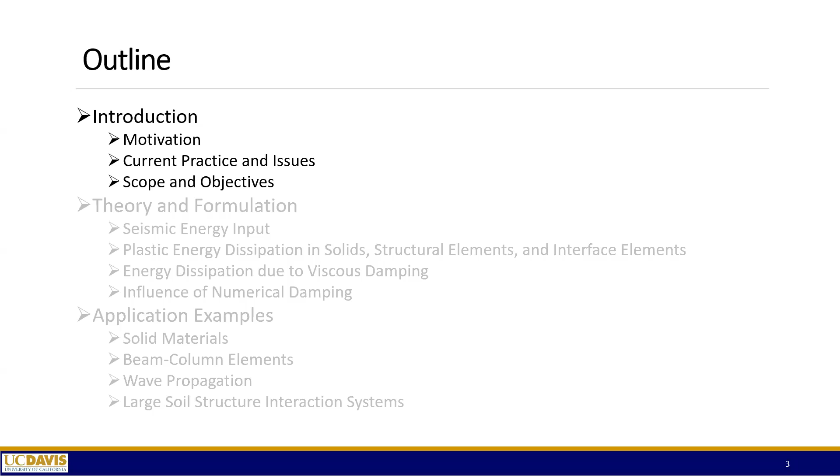For a beam that is loaded like this, usually so-called plastic hinges will develop, and within those plastic hinges there will be material damage, permanent deformation, and also energy dissipation in the form of heat. So the point here is that if we can properly model energy dissipation in structures and soils, we can actually track the material damage, and that is very important information in engineering designs.

Can you go back? I'm sorry. So essentially the idea is to change the design so that, for a given earthquake, or different motions for a given set of motions, you change the design in such a way to dissipate energy, to damage the material, the structure and the foundation and soil if you care about that, in a way that you as a design engineer want to damage it, as opposed to designing it and hoping for the best.

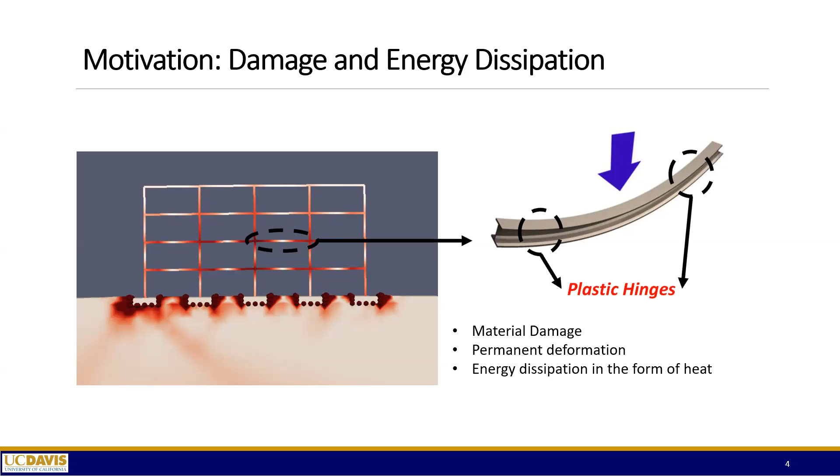And you'll see toward the end, the same example with a different type of foundation actually reduces a lot the amount of damage, the amount of dissipation that happens in those beams. And that's, in this case, what we care about. We want to limit the damage in the structure and maybe put the dissipation down into the soil. Anyway, I'm sorry, go ahead. Yes, that is absolutely correct. Later we will revisit this example to directly show you how changing design can result in a change in energy dissipation.

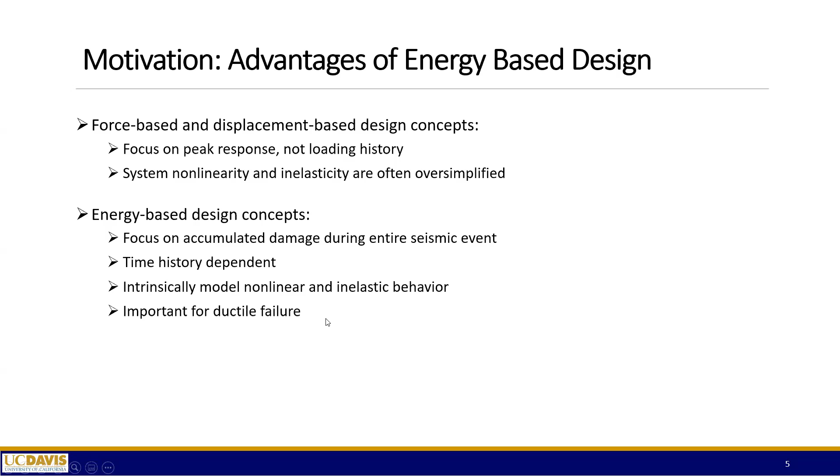So here are some of the advantages of energy-based design. On one hand, we have the traditional force-based and displacement-based design concepts that mainly focus on peak response, not loading history, and often oversimplify nonlinearity and inelasticity. On the other hand, the energy-based design concept focuses on accumulated damage during the entire seismic event. It is time history dependent. It intrinsically models the nonlinear and inelastic behavior of the materials. And it is very important for ductile failure because it tracks the accumulated energy dissipation and damage.

However, in the energy-based design field, this oversimplified modeling is still a predominant problem. So we can definitely improve on that. And just to interject here, so yes, these simplified models might be okay, but one has to be able to show with a more sophisticated model that these simplified models, which can run very fast, are able to model all the details of what is of interest to the engineer. If they cannot model that, for example, if it's a single degree of freedom system, you cannot model the second mode. Maybe the second mode is important.

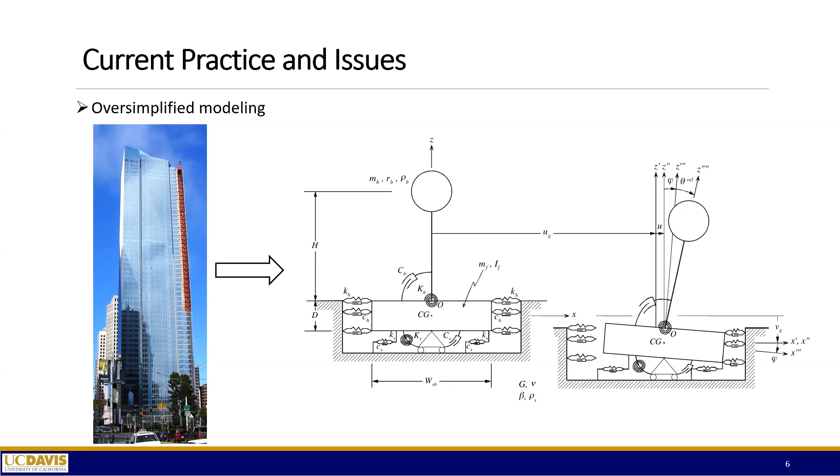Things like that. And of course, these sets of dampers and springs at the bottom, I'm not sure that they actually properly represent the behavior of soil and radiation damping and viscosity of the system and so on. So they might be okay for some analysis, but you have to be able to demonstrate that they're okay. And to demonstrate, you have to be able to go one or two levels of sophistication higher and show that those simplifications are not destroying your results. Go ahead, I'm sorry. Right, yeah, no problem. So yes, that is one big problem, the oversimplification.

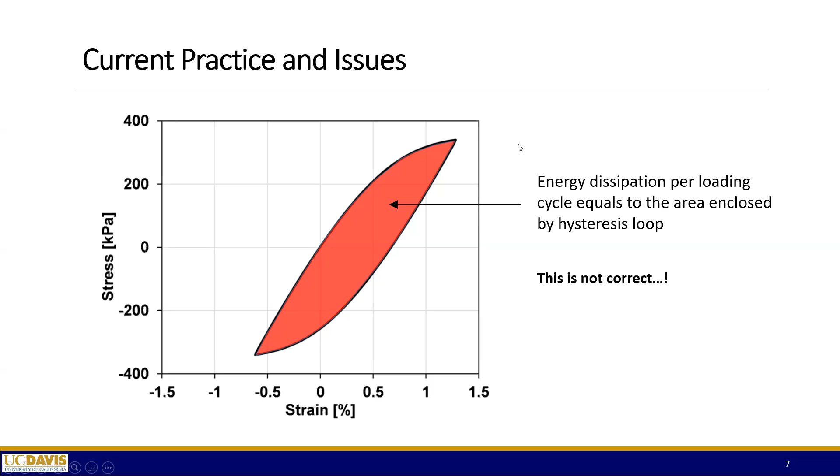So next we move on to a more technical issue here. So this is what we have been taught for a really long time. So for example, if we have a stress-strain loop that looks like this, then we have been taught that the energy dissipation per loading cycle equals the area enclosed by the hysteresis loop. So basically, if you have a loading that goes one cycle, you say that this red area here is the amount of energy dissipation per that loading cycle. But however, that is not correct. And later we will demonstrate why this is not correct.

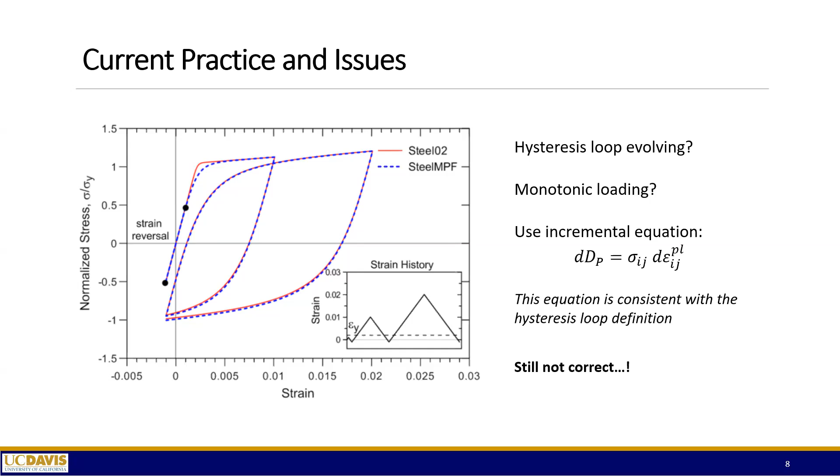However, the same as before, this is still not correct. And again, we will talk about that. Yes, so this equation is what I remember from school. Essentially, everybody thinks that this is plastic dissipation. It is not. It's plastic work. Yeah, I'm sorry. Go ahead. Yeah. So let's first look at what would happen if you actually use that equation, and that happens a lot in literature. So this is an example we obtained from one of the many famous papers.

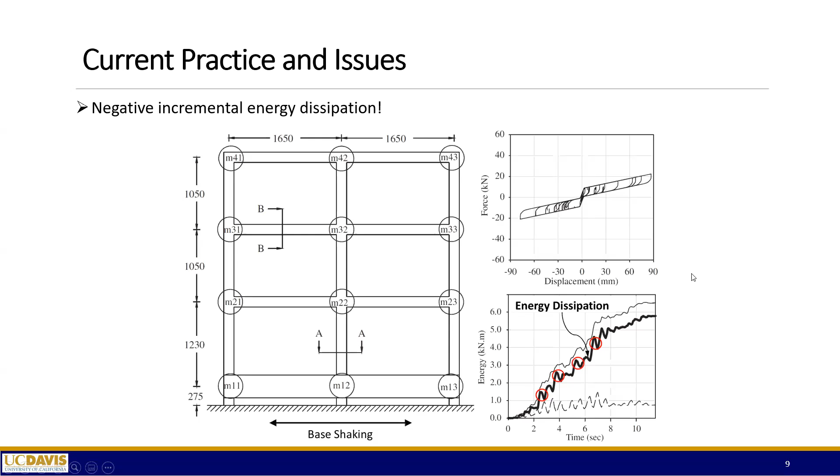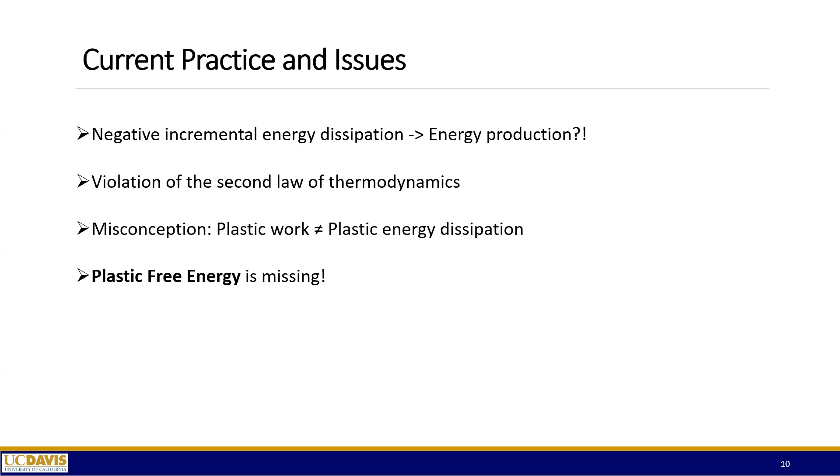So a negative incremental energy dissipation means that at those time steps, you actually have energy production. And that is a direct violation of the second law of thermodynamics. That is impossible. So something was wrong there. So the source of that problem is actually the misconception between plastic work and plastic energy dissipation. As Professor Boris mentioned before, those two are not the same. And the difference between them is a very important energy form called the plastic free energy. Yes. And of course, we will talk about the plastic free energy, its source, and how we calculate that.

Okay, so here, let me just move on to kind of a bigger picture: the entire process of the propagation of seismic energy from the source to our local site. So we know that at the rupture of an earthquake, there is a huge amount of potential energy released at the earthquake source.

And then this amount of potential energy will propagate in the earth with the seismic waves. So we know that during that process, there's a huge amount of energy already dissipated with the scattering of the waves and the inelasticity of the rock and soil. So there will be a certain amount of mechanical energy that reaches your local site, and this is where our interest starts. So this is the scope of our work here.

So when this mechanical energy reaches your local site, it will be transformed and dissipated into various forms. So first, we have a small amount of the energy that is still in the form of mechanical energy that is stored in the system. This is the part of the kinetic energy related to the shaking. This is the strain energy, elastic strain energy. And then we also have a certain amount of the mechanical energy radiated out of the local system together with the outgoing seismic waves. And then on the other hand, we have various mechanisms for energy dissipation.

We can have the inelasticity in the structure that contributes to structural damage. That's something we care about very much. Then we have the inelasticity in the soil. We also have the friction slipping in the contact interface region between the structure and the soil. And also we can have viscous coupling in the soil if the soil is saturated or partially saturated. And we can also have artificial energy dissipators in the structure to help the structure resist seismic events. Then of course we have the tricky component, which is the plastic-free energy.

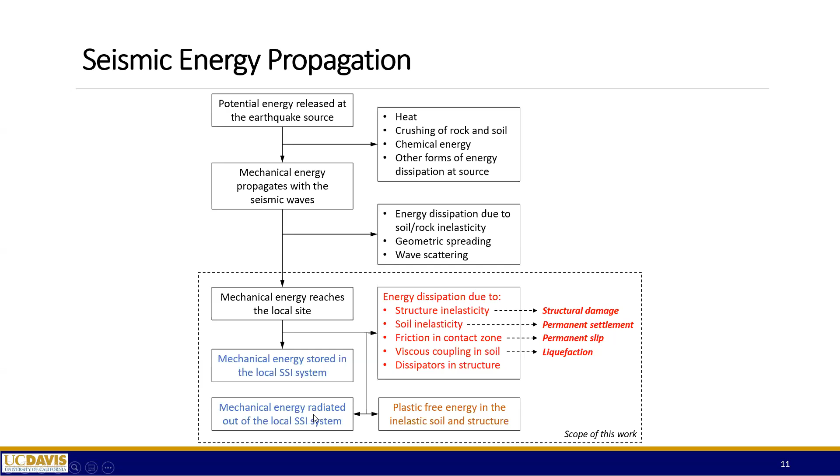So this is the scope of this work. We're trying to basically model and calculate the energy transformation within this process, to be able to account for all these components of energy. That's the point. Yes, go ahead.

Okay. So here, as part of the introduction, just to give you some of the history of the plastic-free energy term. This term of plastic-free energy was first discovered in metals, in a series of studies by Professor G.I. Taylor and his colleagues, as far back as 1925. In his experiments, he applied some loading and generated some plastic deformation on the metals.

So this figure here is showing two things. The axis on the left side shows the percentage of plastic-free energy out of the total input work. And on the other side of the axis, we're showing the stress. From the stress curves, we can see that there's definitely some plastic deformation. So that means there will be plastic work and plastic energy dissipation in this study. Here, those dots demonstrate the percentage of plastic-free energy out of the total input work. We see that in this specific case, about 10% of the total input work is transformed into plastic-free energy.

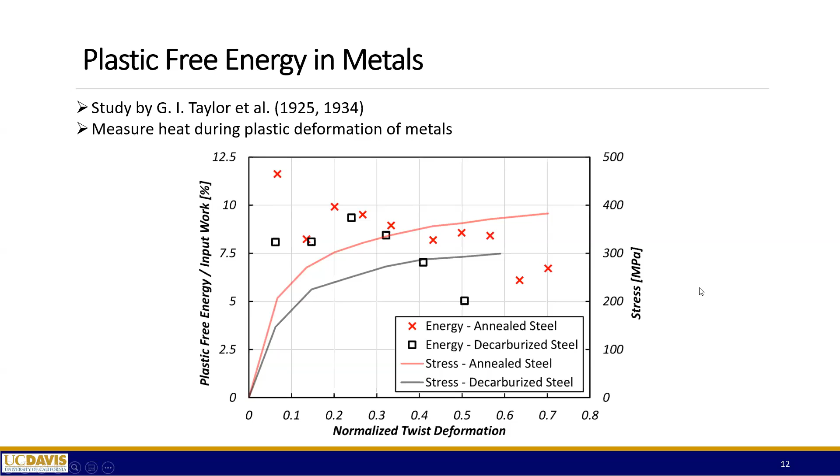Okay, so after the discovery of plastic-free energy in metals, in our field we also care about granular materials like soils, sand, and other geotechnical materials. In those kinds of materials, the plastic-free energy is even more important because it can be attributed to the multi-scale effect of particle interlocking and rearrangement. So basically, the physical nature of plastic-free energy is the strain energy on a particle level. This is a simple illustrative example to show you the idea.

So here what we are seeing is basically an assembly of particles. Let's focus on this particle A right there. Let's imagine particle A here is only in contact with two other particles, and at this point is only bearing its own self-weight. That means the strain energy on this specific particle is very small. But then let's imagine some loading is applied to this material.

And then this particle B here is being pushed into particle A, and even further, particle A is now stuck inside this void formed by the other particles surrounding it. So at this point, particle A not only bears its self-weight, but also the external load, which means the strain energy stored in this particle is much higher compared to the original state.

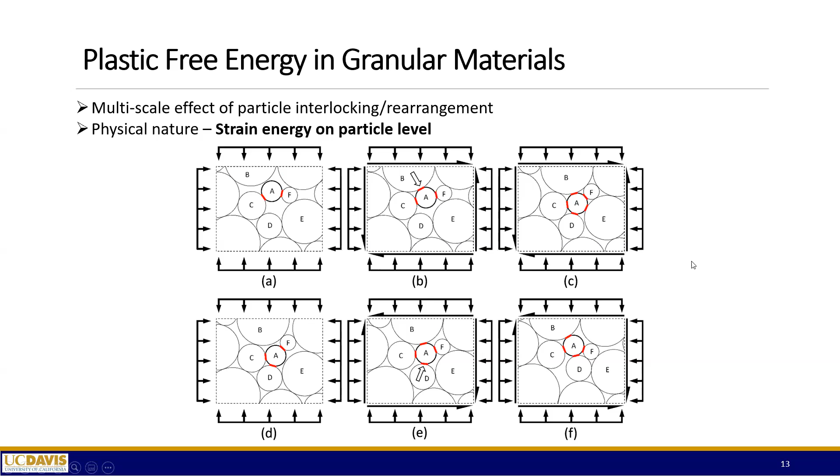Okay, so now we have identified the plastic free energy and the importance of it. So we can say that the original definition of this incremental equation, as the stress tensor multiplied with the incremental plastic strain tensor, actually describes the plastic work. So the actual plastic energy dissipation is calculated by subtracting the plastic free energy from the plastic work. And later in the next lectures, we'll talk about exactly how you calculate each of those terms for different kinds of material models.

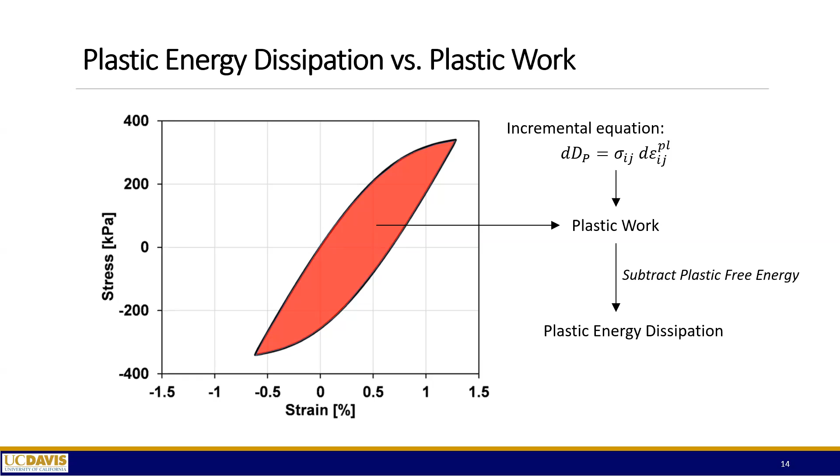So here is the same example we presented at the very beginning, just to show you how this information can be used in engineering designs. We have this 2D frame soil-structure interaction system. We have the frame structure on top, the soil underneath, and the contact interface element between the foundation and the soil. A very important part here is that even though this is a simplified 2D model, it is a code-conforming design, and all the material parameters are carefully calibrated, so the information we obtain from this example is actually very informative.